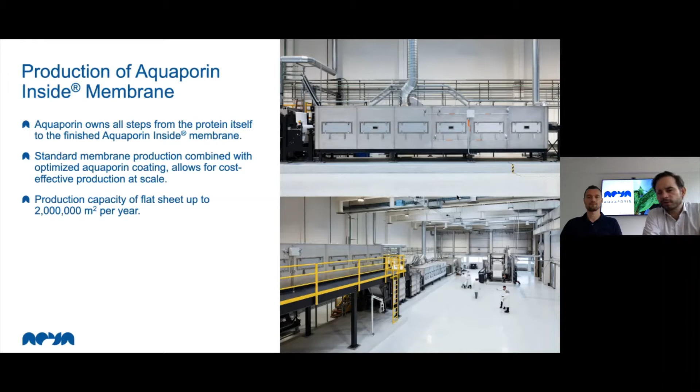And actually our first commercial product has been in the household market, so purifiers for your own home. And in India, that would be brands like Eureka Forbes or Kent and so forth. So this type of household purifiers, that's one application of our membranes.

We are currently piloting brackish water and seawater RO, so high pressure membranes that can both be used for wastewater treatment, but also directly in seawater desalination, lowering the energy use and producing higher quality water.

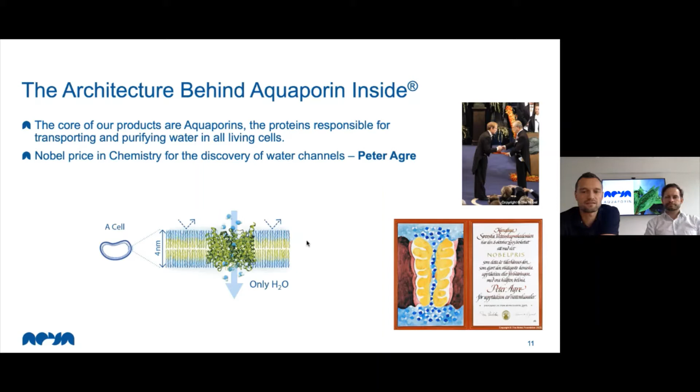Lipids in themselves, of course, as some organic substance, are prone to denature, the same as the protein. So if you think about an industrial water process, there are sometimes conditions that you wouldn't think a cell can withstand. And to mitigate that, we have developed a stabilization technique based on polymers. So we take the aquaporin protein and we put it in an assembly of polymers that resemble this lipid bilayer or lipids.

So you can have diblocks or triblocks where you have the same buildup. You have a hydrophobic and hydrophilic part, and they can self-assemble into vesicular structures. And then the protein can sit within there. The size of those vesicles can range from 50 nanometers to 200 nanometers. So they're very small, but they are quite stable. Once the protein sits in this assembly, it is functional and can withstand quite some operating conditions.

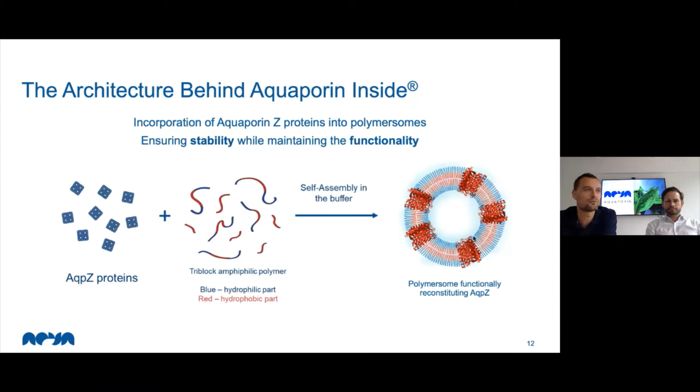However, those vesicles would just be floating away in a stream of water if we don't attach or encapsulate them. So that's why we take those protein assemblies, those vesicles with the active protein in there, and trap or encapsulate them in a TFC layer.

If you're familiar with water and membrane technology, you know a TFC layer, that's the selective layer sitting on top of RO-type membranes. So you have a thin, something like 200 nanometer thick layer that's built up of a polyamide, and that has already some good transport and rejection capabilities. And by incorporating the aquaporins, we can enhance those.

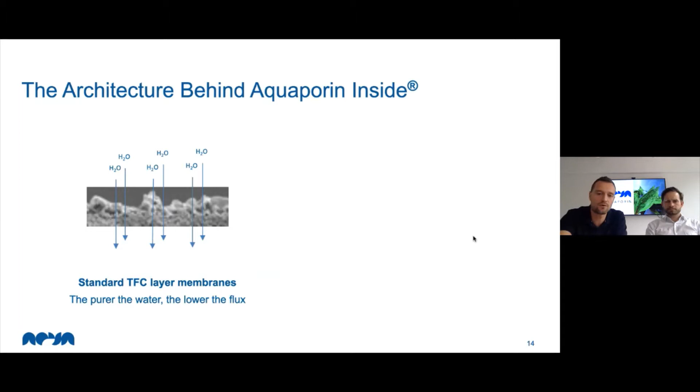So by using this TFC layer, which is a known technology, we already ensure that pH 1 to 13 or temperatures 4 to 70 degrees Celsius can be tolerated by this membrane and by the proteins without damaging them. The normal TFC membrane is of course permeable to water, and many other compounds, contaminants, are rejected, but there's still some going through.

What we do with the aquaporin membrane is introduce a highway in the TFC layer, so the proteins transport water faster than it takes to diffuse through a densely packed polyamide TFC. And since the proteins are highly selective for water only and nothing else can penetrate them, we get a stream of cleaner water through, which gives us the opportunity of a higher rejection or a higher flux, or both together, depending on how we tweak the whole membrane layer and what we want to address.

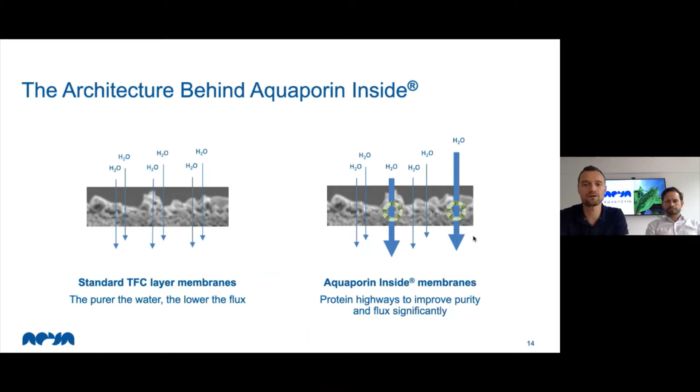So that is the overall aquaporin inside technology: introducing the biological selective component into an active membrane. If you think about a cell and a cell membrane and how transport works, the aquaporin is actually quite optimized for osmotically driven processes or water transport. So in contrast to pressure driven, what we all know from RO, NF and other technologies, forward osmosis is osmotically driven.

Here the membrane is semi-permeable, which means it mainly only allows water transport, and rejects contaminants from the feed, but also keeps the salt in the draw solution, or the active ingredient that makes the osmotic pressure. That way, nature wants to equalize the concentration difference, and it can only do so by water transport, since the ion transport is limited by the membrane. So we have water transport going from our feed solution to our draw solution.

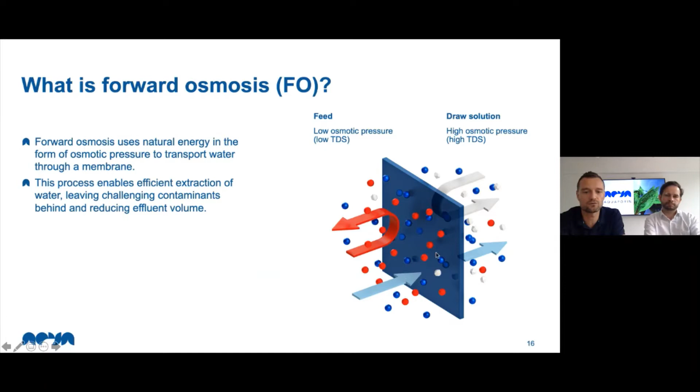However, we can have draw recovery systems that then separate the draw solution, so this high osmotic solution, from the feed solution, from the clean water that has been transported out of the feed solution, and then we end up with clean water, and our draw solution can just be re-looped into the process and do it all over again. So you have a continuous process of producing your clean water.

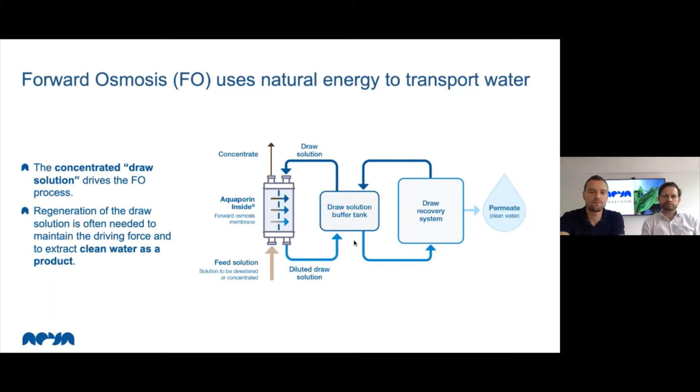What is especially interesting in forward osmosis, when you compare it to reverse osmosis, is that certain process conditions are completely different. In reverse osmosis, you have a hydraulic pressure, so everything you have in your wastewater is basically pressed against the membrane. It therefore creates a dense fouling layer, which often needs harsh cleaning steps.

Of course, it has high rejection and high recovery, but it also has a shorter lifetime and uses a lot of energy because you have to overcome the natural osmotic pressure between the clean solution and your concentrate that you produce. It's different in

forward osmosis because here, of course, no filtration goes without fouling. We don't have a no-fouling process, but the fouling layer is less dense because you don't have an active pressure that presses your cake layer together. So it's a bit more loose, and that's why it's easier to clean. It fouls slower. It's easier to clean.

It even has a higher rejection than reverse osmosis, especially when you put in aquaporins. And then, of course, you can go to even higher recoveries because your fouling is a bit delayed, and that's why you can also have a longer lifetime with less cleaning. And of course, you have a lower energy consumption if you run the forward osmosis process only.

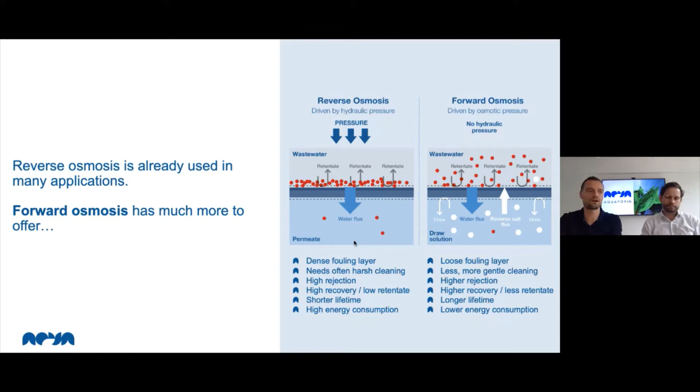Of course, if you have to couple it with a draw recovery process, then energy might be the same, but you end up with a process that is lower in OPEX overall because you have less membrane exchange and usually a cleaner water product. So with what solutions do we actually tackle the whole thing?

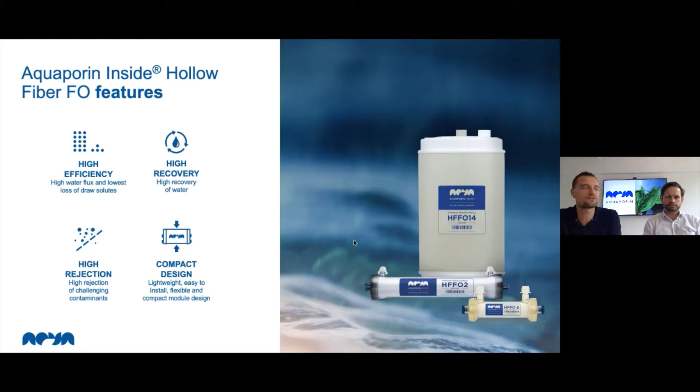The big advantage of forward osmosis, as I said, is that there's no high pressure. So that's why we can introduce the hollow fiber technology, where we have a high packing density, so a very compact and lightweight design packing a lot of membrane area. Of course, we have the aquaporins in there, which gives us the high rejection, and with a high membrane area combined with the forward osmosis process, we also end up with a high recovery, which gives us a high efficiency. So we can, on a small footprint, concentrate solutions quite easily and to a high degree.

We currently have 3 different products on the line, and just to point out how much you can pack in a hollow fiber module, like the hollow fiber 2 that you see in the middle here, it's about that size. But it has 2.3 square meters of active area. You can't do that with a spiral module, and that's why the hollow fiber technology is very good for forward osmosis, because it can pack a lot of area in a small

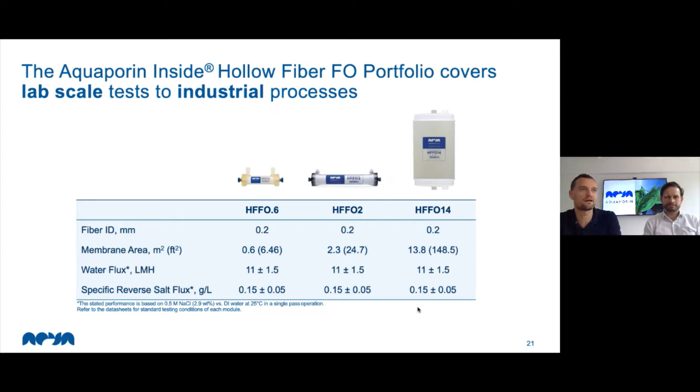footprint. However, as you see here, the inner diameter of those fibers is quite small at 0.2 millimeters. So if you want to treat something more viscous or with a TSS content, so suspended solids, you might want to change to something that is a bit larger in diameter.

And that's why, as Esben pointed out before, we are open to work with partners. Here, with Berghof membranes from Germany, we developed a tubular module that has our coating on top. The base is from Berghof, our coating is on top, and it's ideal for something like fruit juices, where you have high viscosity that you need to treat.

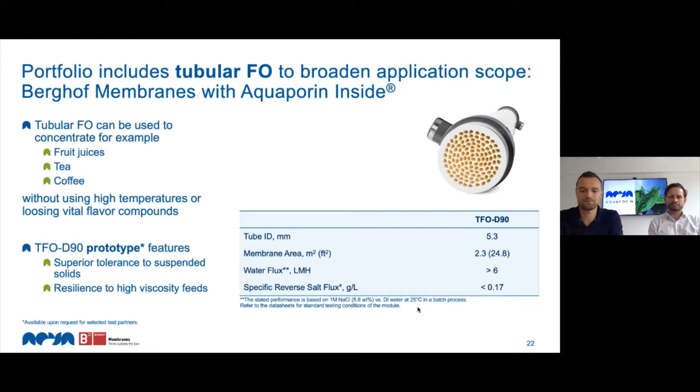If we now look at some examples to give you an impression of what the Aquaporin Inside technology can do in forward osmosis, we have some examples from the industrial water industry. From semiconductor, here are some examples of contaminants, where we have a rejection of copper, iron, nickel, and fluoride of over 99.5% at the lowest. So actually, almost rejecting everything that comes our way.

Of course, boron is a compound that is known to be hard to reject. Even at 94% water recovery, so removing 94% out of a feed solution, we still have an 87% rejection for boron, which is to our knowledge unrivaled in membrane processes. And that can even be increased when we do a pH adjustment if needed. But of course, you want to adjust as little as possible because you want to keep your process as undisturbed as possible.

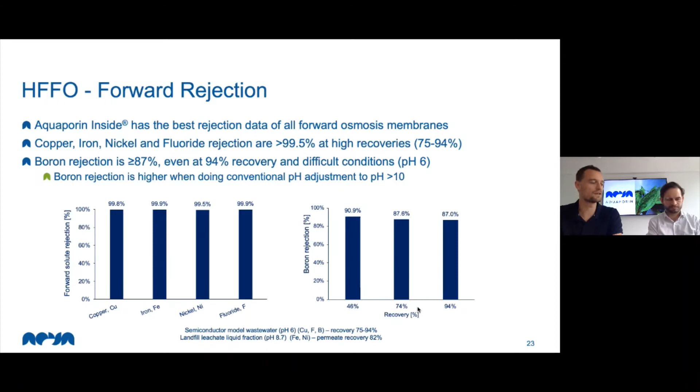We now look at another thing that's important in FO, the performance efficiency. Here you look at the water flux and what we call the specific solute flux. The specific solute flux is made up of water flux and a reverse salt flux. The reverse salt flux is a phenomenon that's typical for forward osmosis processes. We don't have a membrane that's 100% semi-permeable, 100% selective for water only.

So you always have a certain background noise or a certain diffusion of ions going through because there is an ion imbalance between the feed and draw solution. So you have a diffusion of ions going from one side to the other. Some ions, as you've seen before with boron and so on, go through the membrane in forward mode with the permeate, but there are also ions of the draw solution diffusing back into the feed solution. And that, of course, has influence on your process, how much that is.

So you want to keep that back diffusion or this reverse salt flux as low as possible, because it minimizes your use of draw solution and replenishing, and it also keeps your feed solution free of that salt or whatever you use in your draw. The specific solute flux on the right here says how many grams of salt we lose per produced liter of water. With the membranes that we use, we usually have 0.1 grams or even lower per produced liter. So you lose 0.1 gram of your draw solution per produced liter of water.

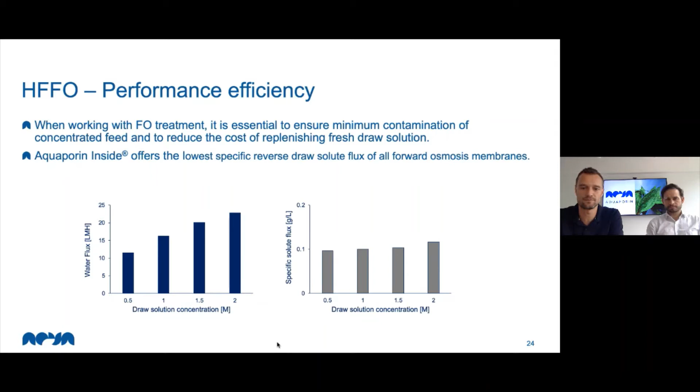Now when it comes to what we can actually do with that technology, we have two fields that we look into here at Aquaporin together with our collaborators and customers. One side is industrial water and the other is food and beverage. Let's take a closer look at the industrial first. Basically you have lots of different industries. It's not limited to any one industry, but you have lots of industries where you need to minimize your waste. You want to reuse water or you want to simplify your effluent treatment.

And that you can actually do with the FO technology, also reducing the installation size or improving logistics. All those together will of course increase your profitability, or your sustainability and your green footprint. That is also a very important item to consider these days, especially if you can show that you responsibly manage the water resources, as pointed out in the introduction, the limited water resources that we have on our blue planet.

If we now look into the efficiency of treatment of industrial water, of course we have problems with contaminated groundwater and rivers all over the world. Basically, wherever you have industry, you will have a challenge with wastewater, and there we are trying to help the customers or the countries themselves to clean up or reuse some of the waters. I want to introduce two examples that we had. Here we worked together with a customer, but we have done it so far only in lab scale.

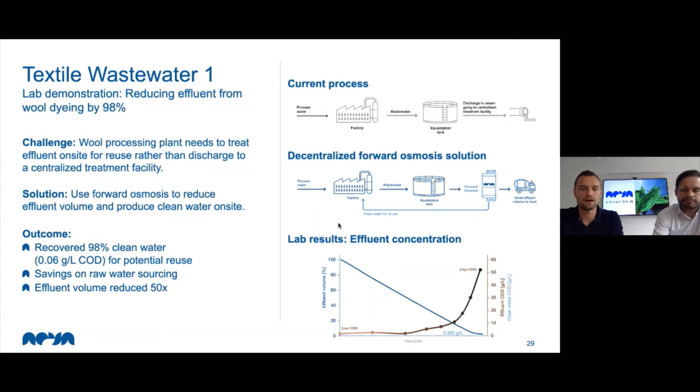Exactly. And there, of course, you have savings on the raw water sourcing, which puts less stress on the environment, because you don't have to pump it out of a river or out of the groundwater or anything. So it's a more sustainable solution. And of course, you have your effluent volume reduced by quite a lot in the end.

The second one is where the factory used to be able to produce their wastewater and then just discharge it to the sewer, to a centralized treatment plant. Suddenly that's not allowed anymore, because either the treatment plant is too small, or the municipality says, well, we can't treat your wastewater because there are compounds in there that we don't want in our treatment anymore. So then these companies suddenly have a problem on their hands.

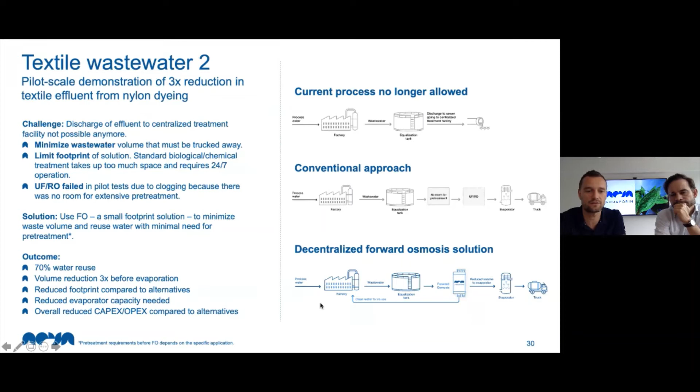But they still have to minimize their wastewater, because they don't want to put all the water that comes from an equalization tank to an evaporator, because that makes your evaporator big and your energy consumption even bigger. So what we do is put in a forward osmosis process and reduce the volume that comes to an evaporator, and at the same time have clean water reused in the factory. So in that example, we went up to 70% water reuse, which makes it 70% less volume that has to be treated by an evaporator.

That, of course, has an influence on how big your evaporator needs to be, how much money you have to invest there, and how much energy you're going to use. So they can decrease their footprint, and of course the capex and opex that they need for other treatments. And I forgot to mention that this was a textile effluent from nylon dyeing.

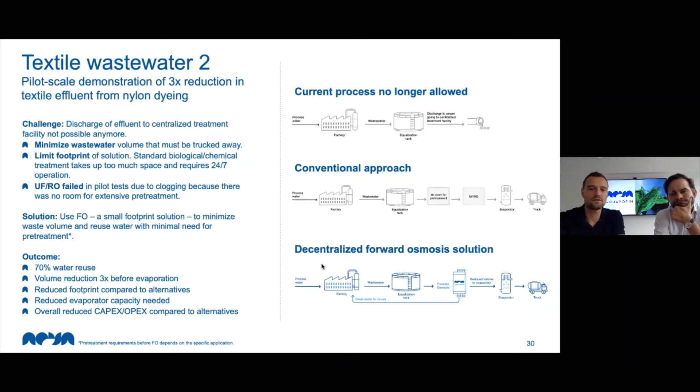So those are two examples, and then one more example, which is a bit more out there, you could say, in preparation for future Moon and Mars bases, or wherever we want to go at some point. Water is a very important factor there, and as soon as we go out from low Earth orbit, where the ISS is, to beyond that, water resupply is not possible on a week's notice. If you think of the Moon or even Mars, it takes a bit to get there.

So if you want to have a permanent or semi-permanent residency there, you need to be able to reuse a lot of water. And here NASA has, at their research center in California, installed what they call a sustainability base, where they try out all kinds of techniques, not only for water, but also other technologies that they might be able to use for a base in space.

In that example, we treat gray water. Gray water is all the water that comes from a building that's not from the toilets. So you have sinks, showers, your kitchen, and all that water is pre-filtered and collected in a tank, which for that building is only about 1 cubic meter per week. But it is an ideal size for us to try what's possible.

And here NASA installed a solution that can reach up to 85% water recovery. It treats the one cubic meter in 8 hours. So the process only has to be run once a week, and then you have 85% of your water that you can reuse. And the other water can then be treated either in an evaporator or with other technologies, so you can recover even more there.

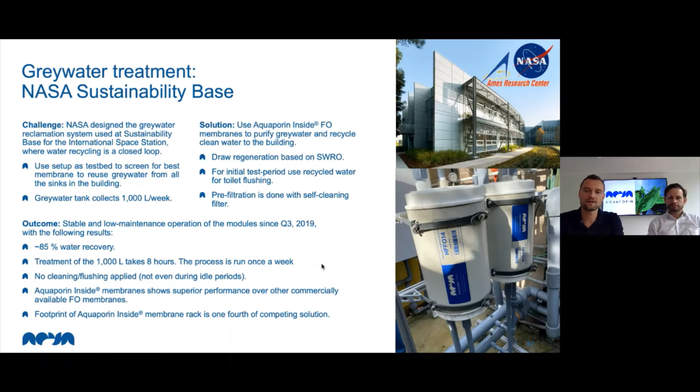running that way. So that's actually a solution where, even though you don't have the optimized water flux that you want in an industrial process, you have a stable water flux with low or no fouling that is actually transporting water the whole time. And that's something that is highly valued by those NASA engineers.

So now to go a bit more the other way, away from wastewater to actually valuables and concentration there, Esben will take you a bit further into the food and beverage examples that we have. Yeah, I think we just have 5-7 more minutes before we round off and take any questions. So let's look a little bit into food and beverages, which is of course also a very big industry, and not the least in India.

If you look at FO, forward osmosis as applied in food and beverages, then it's about product concentrations. You can concentrate your product while retaining aromas, nutrients, flavors, so make a natural product just without the water. You can make super concentrates, so concentrates to even higher level than you otherwise could, especially with filtration solutions, with an improved quality. And that can actually lead to better logistics costs. It can also lead to lower processing costs, and then you can even make new and improved products with better taste and flavor profiles. So this is a very interesting value proposition.

It all comes from basically a favorable comparison to either traditional filtration or to evaporation. If you use other filtration techniques, you will lose more of the aromas and flavors, and you will not be able to concentrate to as high a degree as you can with forward osmosis. Whereas if you use evaporators to concentrate, then you will have very high operational expenses, especially for energy, and you will basically be cooking your product since you're evaporating it, and that of course deteriorates the flavor profile.

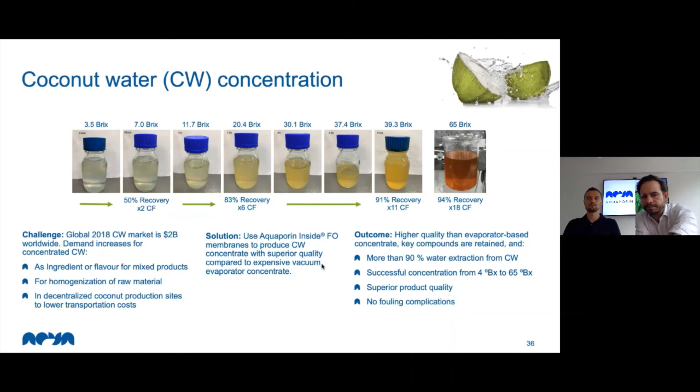Another example is coffee. Coffee is, of course, fresh brewed coffee. It's also instant coffee, so freeze-dried coffee, and it's also mixed drinks coffee, so coffee with milk, coffee with all sorts of other additives or flavors. So it's a big and important product, and again, it's one where the aromas and flavors are valued very, very highly. I think most of us know the difference between a freshly brewed cup of coffee and instant coffee. And instant coffee, that's basically the taste of boiled coffee, coffee that's been boiled until all the flavors have gone off or changed.

And coffee is a place where there's a lot of experimentation and innovation in terms of new products and new flavor profiles and different ways of preparing coffee. So we view this as a very attractive application that we have high expectations for.

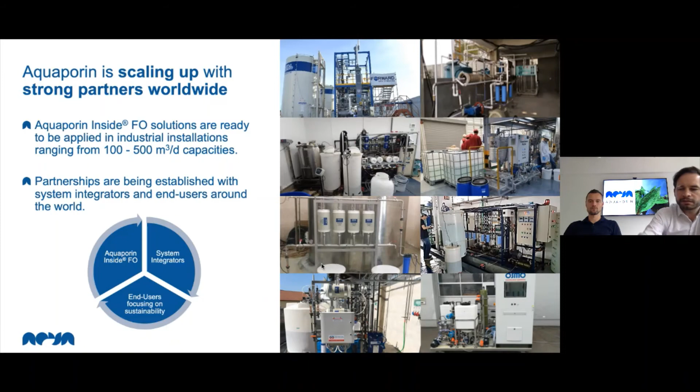Thank you for the nice, lucid presentation. In fact, there are several questions. There are 30 questions now, and we may not be in a position to take all the questions. So I'm going to condense some of these questions and present them to you, as many as we can take in the next 15-20 minutes or so. Obviously, when anybody talks about water, everyone wants to know the cost. So let me start from there.

First question is what would be the cost per cubic meter, and how do you compare that with available technologies in the context of domestic RO, industrial RO, wastewater treatment? I can pitch in on that. And of course, it's a very, very good question, because there is no such thing as the golden arrow or the silver bullet in water technology. Everything has its place. Forward osmosis lives in the space between ultrafiltration and reverse osmosis on one end, and evaporation on the other end.